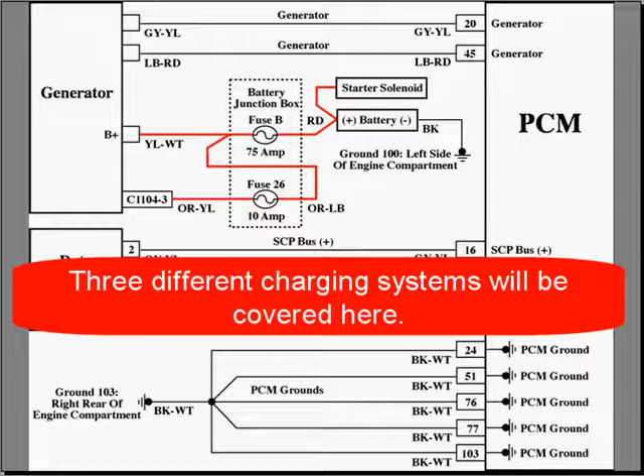They do, however, have some common areas. The alternator output goes directly to the battery on all systems. Another common area is Ford uses fuses or fuse links. Now in the top example we have a 75 amp and a 10 amp fuse in the alternator circuit. In the lower left-hand corner example we have 3 fuse links.

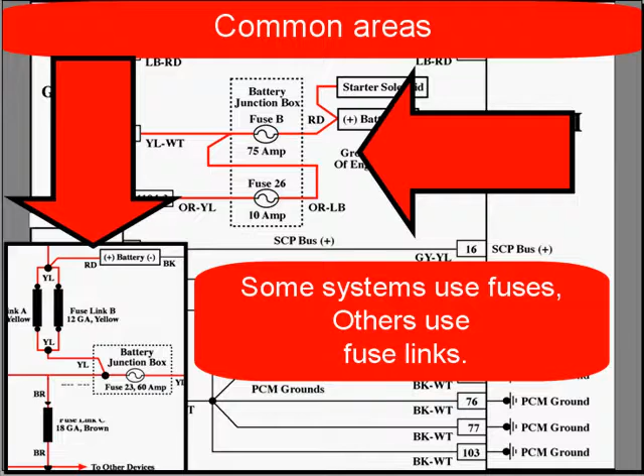Now if these fuses or fuse links burned open, the alternator will appear dead, and hanging a new alternator on it will not fix the problem. So you have to test these fuses, and it's not that difficult.

For this 75 amp fuse example, test at the large yellow cable. If the fuse is good, there will be B+ there at all times. And to test the 10 amp fuse in this example, test at the orange and yellow wire. If the fuse is good, there will be B+ there at all times. In fact, testing at the field circuit here tests both the 10 amp and the 75 amp fuse. So it's a one-step test.

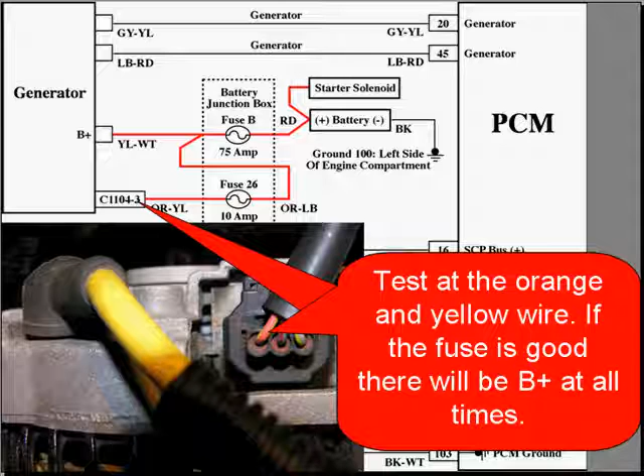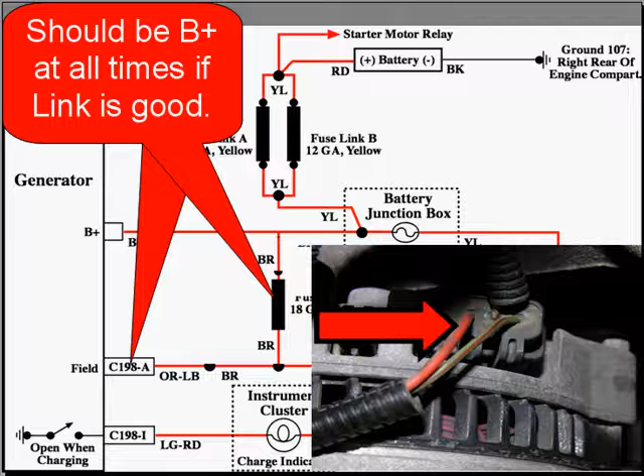This is a system that uses fuse links. A quick step is to test for B+ at all times at the field circuit. It tests that single fuse link in the middle of the page there and the top 2 fuse links. So one simple test tells you that your fuse links are good, and you need to test field circuit voltage before you do anything else.

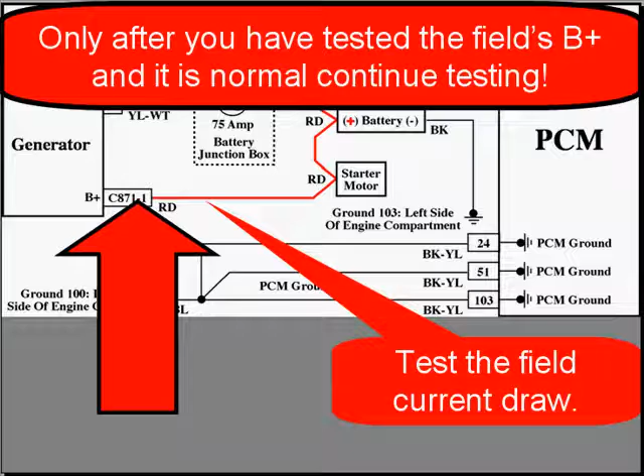Only after you have tested the field's B+ and you find that it's normal, or you've made repairs to make it normal, then you can continue testing. And you want to test the field current draw. You're going to measure the field current draw with a low current probe around the field terminal. You can use a DVOM or a lab scope.

Turn the ignition on, and current will go high for about 2 seconds. The meter is going to average, and we see 1.9 amps. And then in the lab scope waveform, we see a pulse that lasted about 2 seconds.

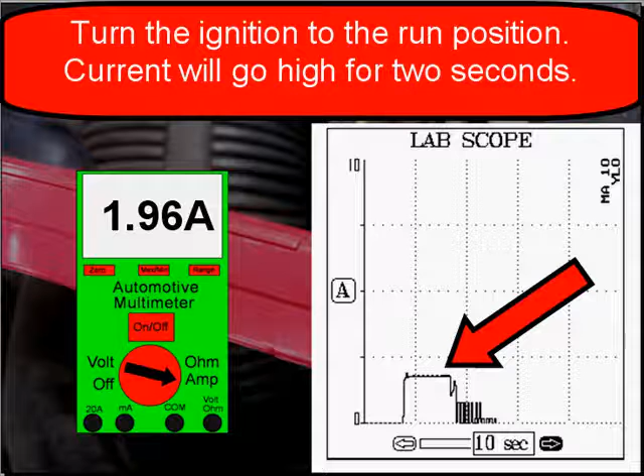Start the engine, and then we're going to get a lower amperage on the DVOM, and it's going to be an average. In the right-hand side there you see the waveform, and you're seeing that the regulation is starting to pulse. And you'll notice that the frequency of the regulation remains the same.

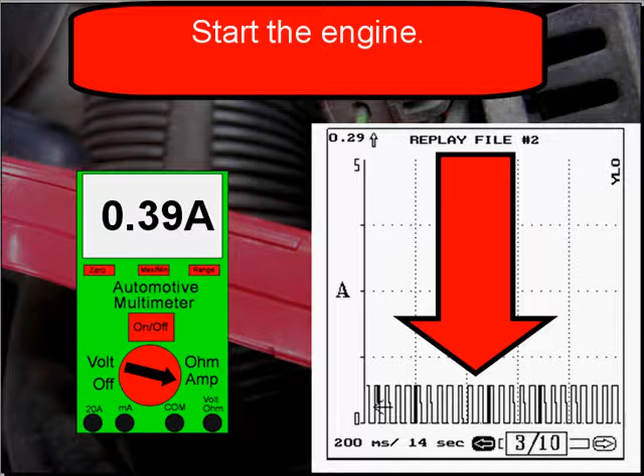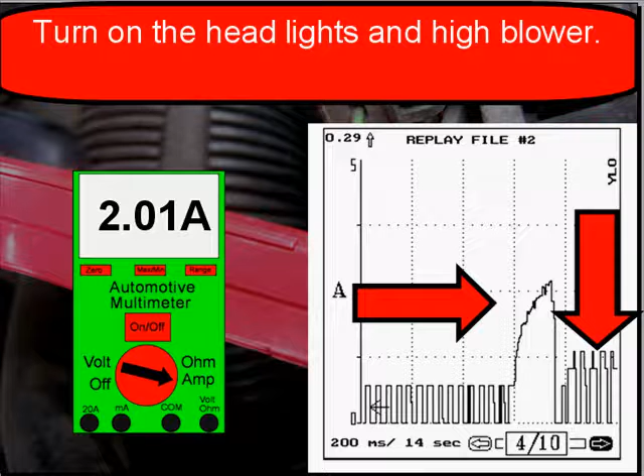Now look at the left side before the pulse, and then the down arrow pointing to the right side. You can see we start pulsing after that big initial load is applied. And what happens is with the lights and the blower on, we're going to draw more current. We have 0.8 amps. Without them on, we had 0.39 amps.

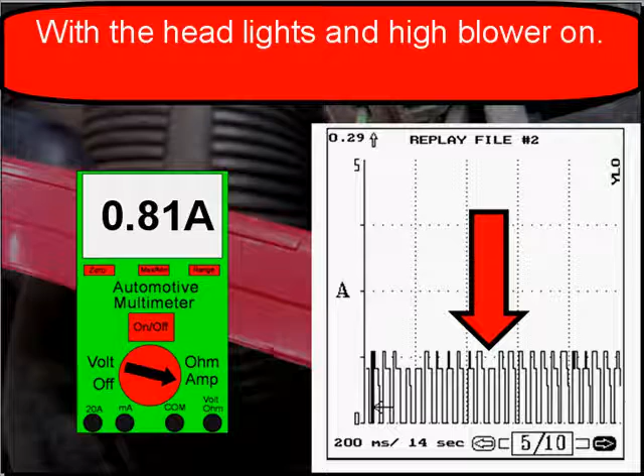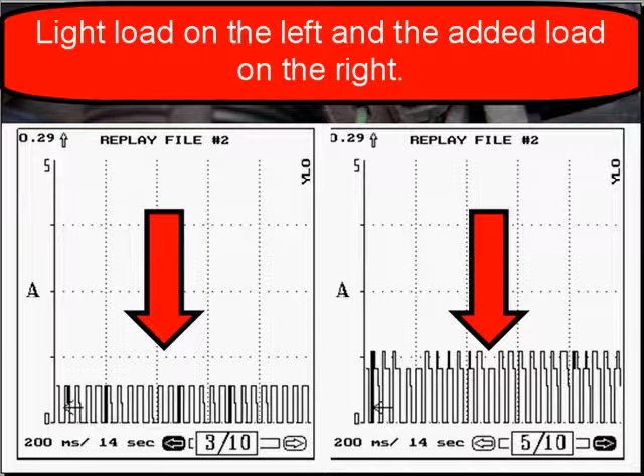In fact, when you look at this, you can see that the current was lower with no loads, and then when we added the loads, current got higher. And if you do notice, the frequency of the regulation remains the same.

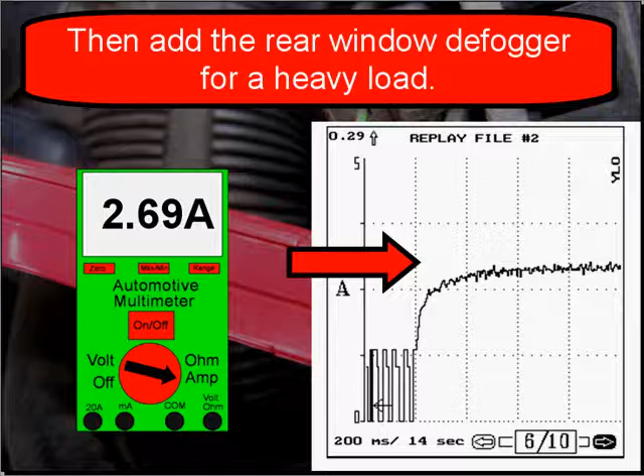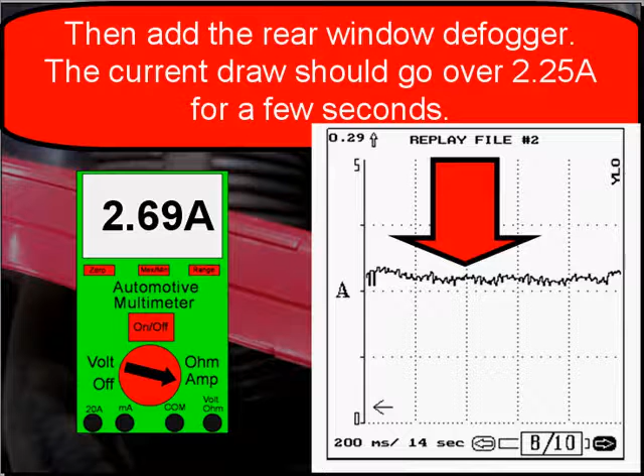Now, we added a rear window defogger for a heavy load, and you can see we went over 2.25. We went to 100%, and it stayed at 100% for several seconds. The current draw should go over 2.25 amps for a few seconds. Here's 5 seconds, and then here's another full second. And then you will see the regulator start to catch up, and current draw drops slightly, and then it begins its pulses again.

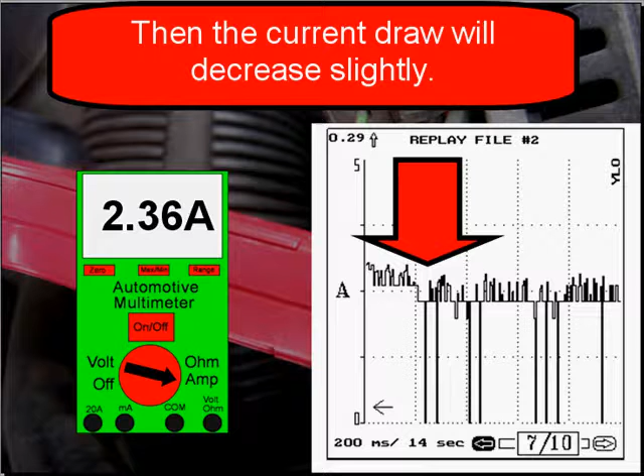So use a heavy load and look for the maximum field current. A good regulator and good field brushes will have a draw of over 2.25 amps. Lower than normal current indicates that the field brushes or the slip rings, the contact between the two, or the regulator is bad.

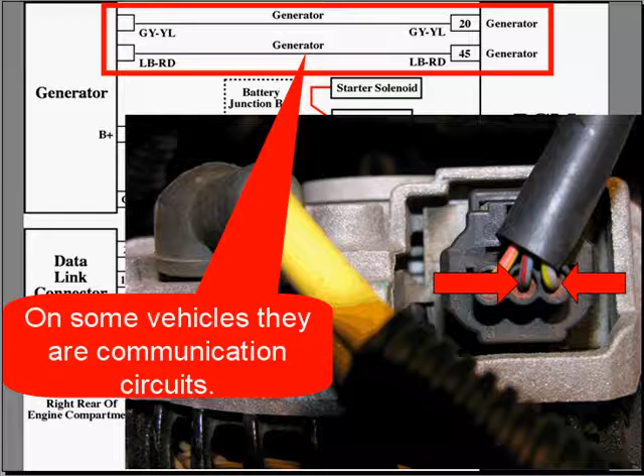Let's continue looking at different systems now. Many Ford alternators have this connector that has 3 wires in it. The 2 circuits will vary between vehicles. One will always be the field circuit. On some vehicles, they're communication circuits. And let's look at that.

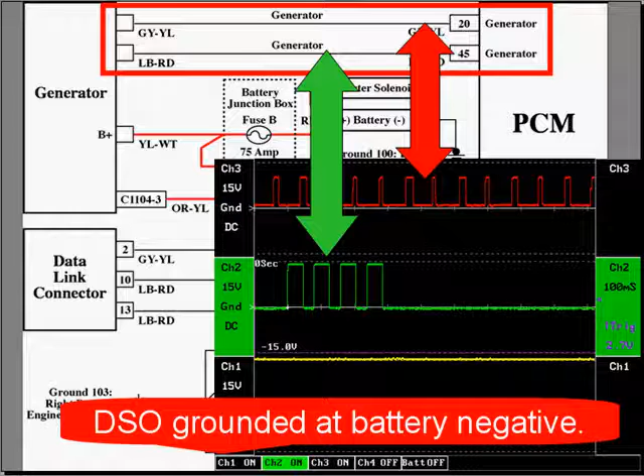As you can see, the gray-yellow wire is our top trace. The light blue and the red wire is our green trace. The digital storage scope is grounded at the vehicle's battery negative. The top signal is from the PCM to the regulator, and this is going to set regulator voltage. This is the PCM telling the regulator what voltage it wants.

The bottom circuit here is from the regulator back to the PCM, and it's signaling the charge rate. The PCM says, hey, I want this voltage set at this point, and then this trace here, the green one, is telling the PCM, this is what I've set it at.

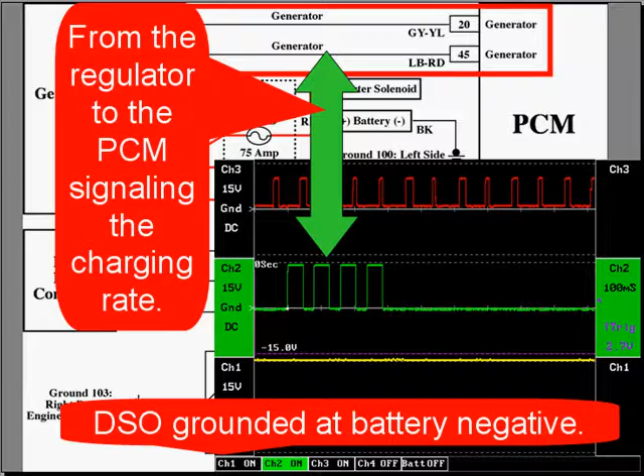This is with no loads applied and a fully charged battery. You can see there are no commands on the top trace, the red trace, from the PCM, and there's some maintenance regulation voltage on the bottom trace.

Now we apply a very small load. Battery slightly discharged after startup will cause this situation. So you start the engine up, the battery slightly discharges, and this is what you see normally: the PCM commanding the set point, and then the regulator with some intermediate pulses saying, this is what I'm doing to follow your commands.

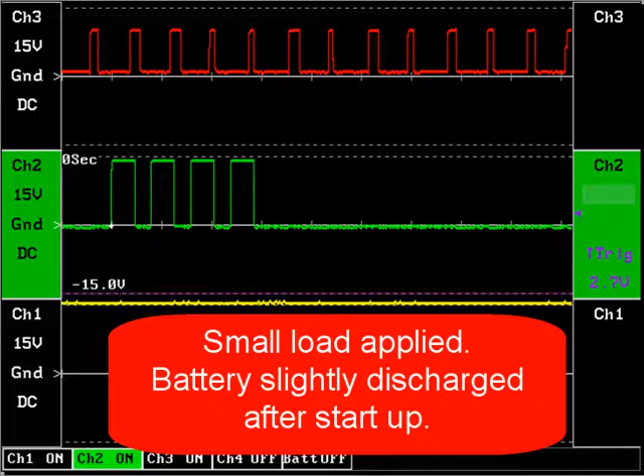And then we apply a large load. We took a 40 amp carbon pile tester and put it across the battery. The PCM says, this is what I want, in the red trace, for the set point. And you can see the alternator is working very hard to establish that. In fact, these pulses look a lot like that field pulse we saw in current draw for the fields.

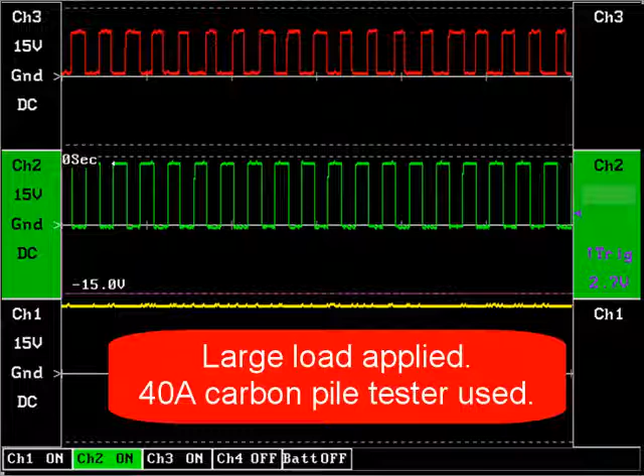And the way you get this image is connect your positive voltmeter lead to data link positive. That's the gray wire. Take your ground to your DSO and put it on the blue wire. That's data link negative. You do not ground the DSO at the battery negative, and you'll get these pulses.

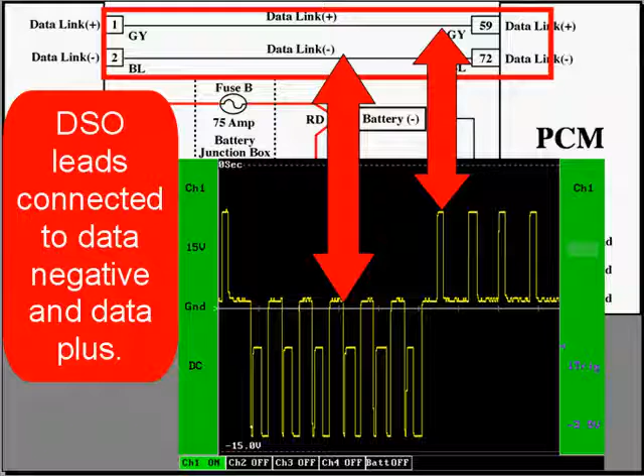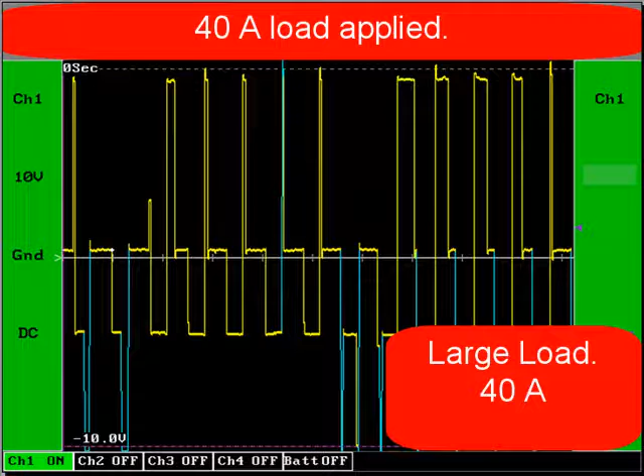Right now we have a light load, but the battery's fully charged. Here we have a heavy load when we applied the 40 amps. Now it's very difficult to interpret serial data, so what you would do is analyze the signal with scan data.

You go into your scan data, you pick up generator control duty cycle, and under this light load, it's 0. Then the generator signal field monitor is at 0.3%. So these 2 values are good for light load.

Under heavy load, you can see the values change. The duty cycle goes to 0.9, and the field monitor goes to 65.1. So no, we don't expect you to analyze serial data on a lab scope. Just go to your scan tool and read the duty cycle and the field monitor.

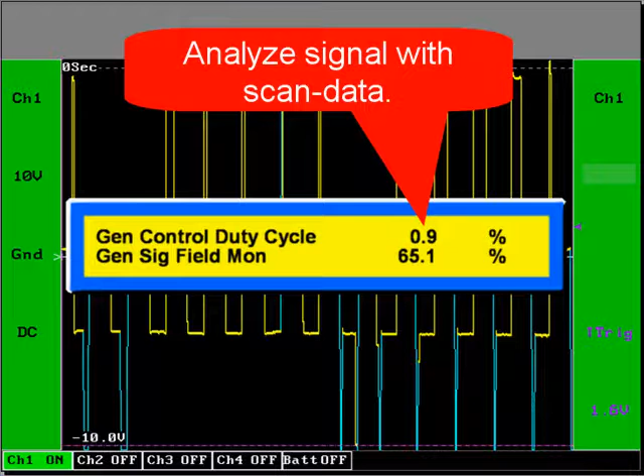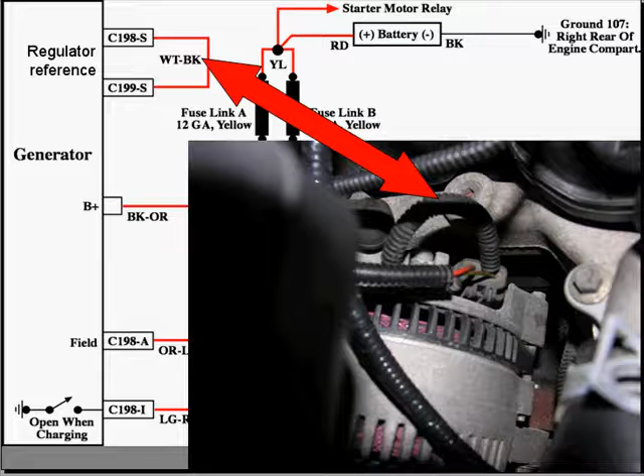Here's a simple circuit. The alternator is self-contained. It's very common to a Ford F-150. Now, the regulator reference circuit can help us diagnose the system. You can see we have that 3-wire connector, but one of the wires loops right back into the alternator to a separate terminal there.

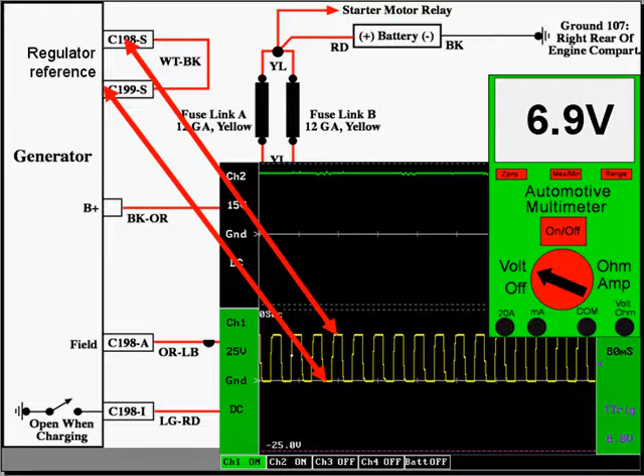Let's look at this pattern by putting our DSO right here on the loop. We get this trace right here as we see. If you're using a DVOM, it's going to average 6.9 volts, 6.5 volts. It's going to average the voltage. You can see sometimes the voltage is high and sometimes it's low, so the DVOM is just simply going to average that. But how do you use this for diagnostics?

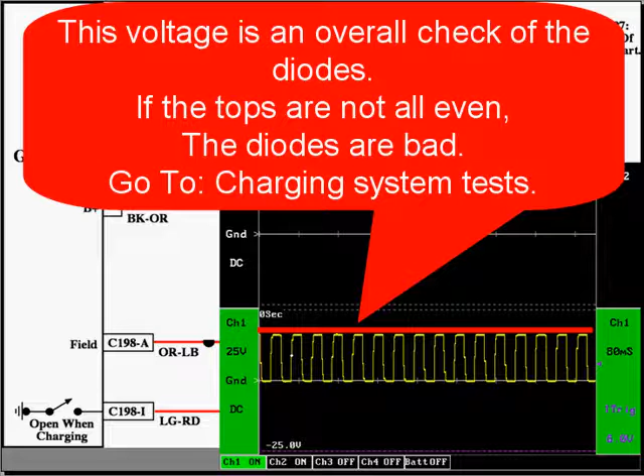This is an overall voltage check for the diodes, if the tops are not all even, some short, some tall, the diodes are bad. You would want to go to charging system test to continue testing. If the pulses are missing, the diodes are bad. Go to charging system test.

Now, on this Ford F-150, we have a charge indicator lamp on the instrument panel. When this alternator is charging, it opens the ground for the charge indicator lamp. Reading from right to left, we have a fuse, then the lamp, and the ground is what the alternator provides. The alternator supplies the ground for this circuit, so when the alternator is not charging, it turns the lamp on.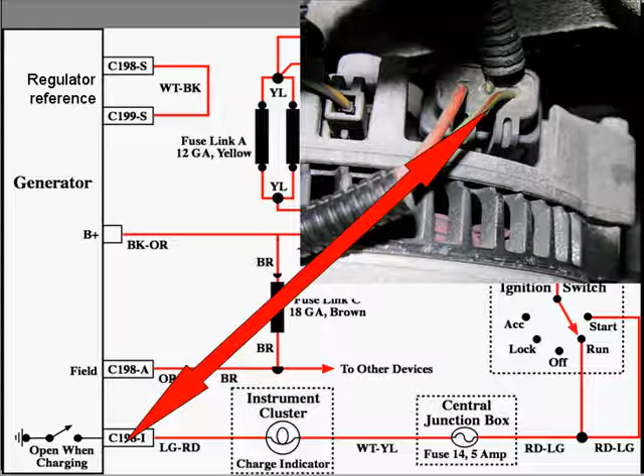As a special note, during researching Ford's charging systems, we noticed that on some vehicles, mostly minivans, the value in the scan data did not match the actual system voltage. What we're saying is the scan data, as in this example, said 13.1, and a voltmeter across the battery said 13.9. Now, if you're using scan data for battery voltage and it seems lower than normal, stop what you're doing before you do any diagnostics.

Put a voltmeter across the battery, and if it is 13.9 as in this example, then you're done. You do not have a charging system problem. So do not take the scan data, 13.1 in this example, and start diagnosing circuits and charging systems, because it may not be a problem. It's just a glitch in the software, and who knows why it's there.

So make sure you know which system you're working on by using vehicle-specific wiring diagrams, and as you can see, it's not that difficult to test alternator circuits.